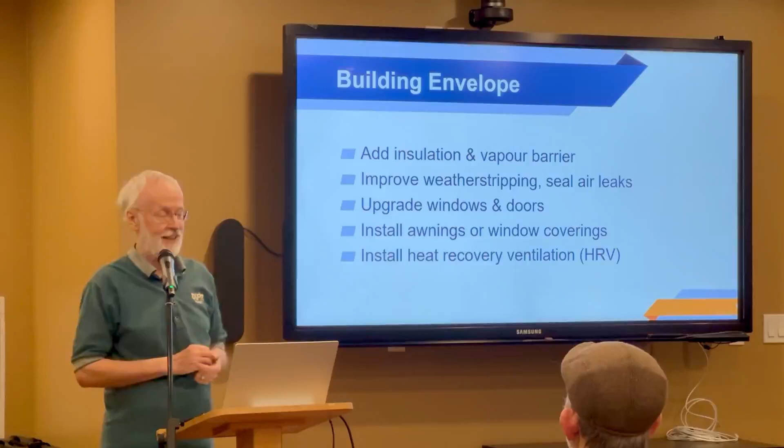So I'm going to go through just two of these examples, one for insulation and one for windows, and give you an idea how to do the calculations, what it's going to be worth.

First thing about insulation, you'll hear people talk about U values and R values. When you buy a bag of fiberglass of say R22 or R28, that basically is the resistance to heat passing through. It's measured in units of BTUs per square foot per degree difference across the front and back of it. Or metric, but that doesn't matter here.

So basically, if you've got fiberglass bat, you get 3.1 R value per inch. So a 3.5 inch gives you 11 to 13, depending on the manufacturer. A 6 inch gives you 14. An 8 inch, etc. The interesting thing is per inch, fiberglass bats are the cheapest and easiest to install, but they're also not the most efficient. So if you've got limited space, moving up to other materials gets you higher performance, mostly at higher prices too.

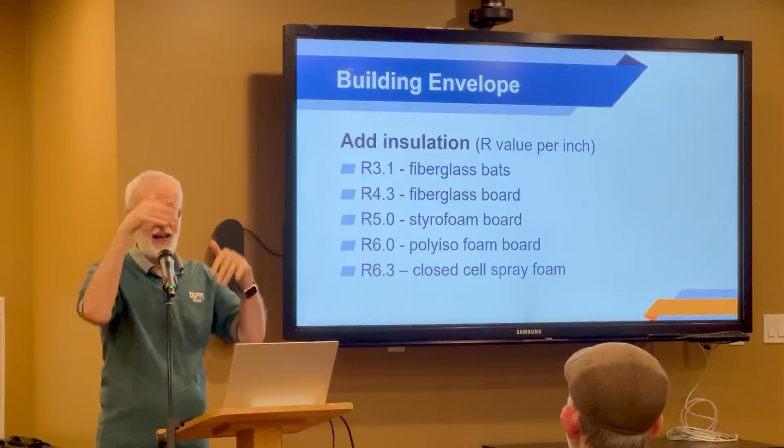So it's trade-offs. Fiberglass board would go on the outside. One of the problems with walls, typically 2x4 or 2x6, with insulation in between, is that the insulation might be R3.1 per inch, but unfortunately the wood is only about R1.5 or 2. So you've got chunks of wood letting lots of heat through, even though you've got a nice bat doing its job in between. So your wall isn't necessarily an R14 wall, it might only be an R9 wall because of the difference between the studs and fiberglass. That's one huge reason you don't want metal studs on an exterior wall, because they're like 0.2 or 0.3 compared to wood's almost 2.

So it's a huge difference. Fine inside, but don't use them on your exterior wall unless you have some way to break the heat transfer. So when I look at a building envelope, this is for a 1965 building that I analyzed, and what I do is look at the window area, how much wall area there is, what kind of construction it is, and what's in the ceiling.

The ceiling insulation might be 6-inch fiberglass in between the rafters. You've got doors, you've got ceiling, and whatever's on the floor. It could be on a crawl space, or it could be a basement, just concrete sitting on grade. How they insulate that makes a difference as well.

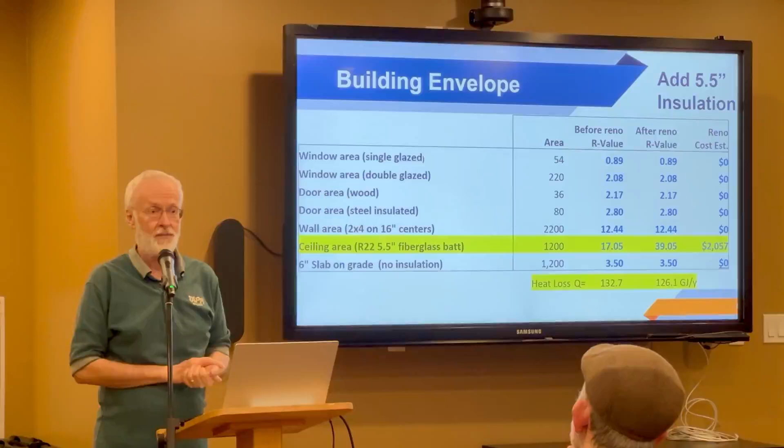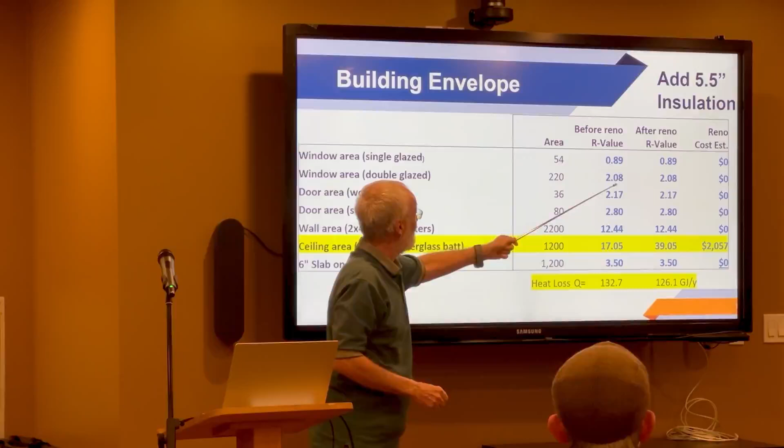So this house had some single glazed windows left. I guess originally in '65 they were all single glazed, but 4 out of 5 windows had been switched over to double glazed a while ago. They were the old double glazed aluminum with a very small air gap, so you can see the R value. Double glazed is much better. However, modern windows, the Energy Star argon filled ones with proper breaks in the frame, maybe vinyl instead of aluminum, are up around R4. So even just switching from an old double glaze to a new double glaze can have a big impact on your heat loss.

But certainly, if you've got single glazed, you want to right away go to something better. In this case, I'm just going to look at the ceiling area. It was a 1,200 square foot home with 2 levels, so 1,200 square feet up above and 1,200 square feet on a concrete pad.

It had 6-inch rafters and 5.5-inch fiberglass in between the rafters, a typical attic for that period. So what I said was, let's upgrade the ceiling area from one 5.5-inch bat by laying another 5.5-inch bat diagonally across on top of it, going to 11 inches total. It's very easy, something anybody can do, or it's pretty cheap to hire somebody to do it. It's just very simple to lay out.

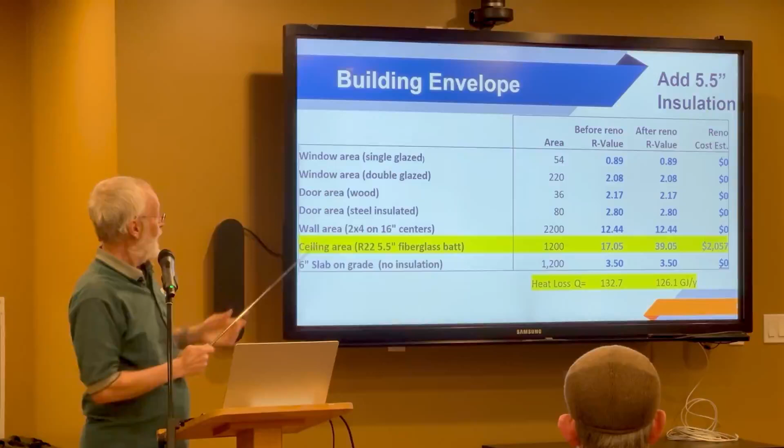And then you can see that R value goes from 17 to 39 because the batt that I chose was an R22, so just add 22 to the old one. And what that does is it reduces the heat loss.

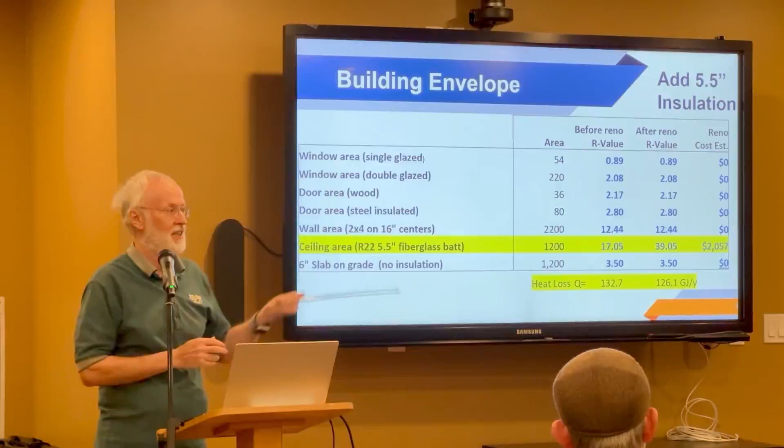If you remember when I told you last week, the average BC lower mainland house used 100 gigajoules. This one was using more, 132 gigajoules per year of heat required to keep the house comfortable. These guys kept it around 69 or 70 degrees Fahrenheit, which is 20 degrees C. When you upgrade the ceiling, it drops down to 126 gigajoules. So it's just a number.

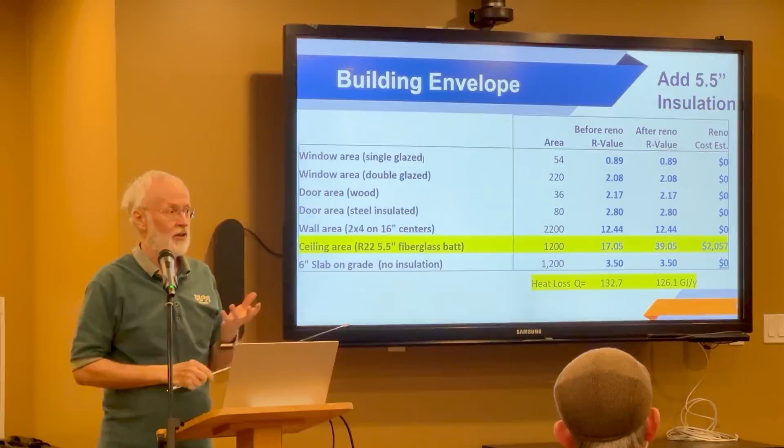The reason I'm telling you all of this is please go out and hire somebody like Ross or any of the energy advisors, because they will model your house. They will actually measure all of the surface areas, look at what's going on, and tell you here's where you are now, and suggest these things are good for you, and if you do it, here's how much you will save. Because with this information, again, the before and after picture for the Q, the heat flow, heat requirement.

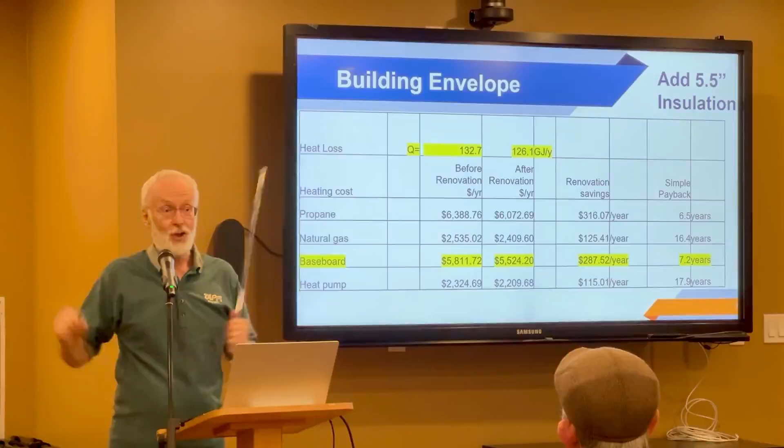If you're on baseboards, that was $5,800 a year that they were paying. Right, their electricity bill was huge. And you can say, if you fix it, you'll save $287 a year, so you have a 7-year payback to something that will last the rest of the life of your house. And you get, this is just if you had to pay for it yourself, you get credits that Ross will tell you all about, so it's actually way better payback. So again, if there's things like this you can do, this is really worth it.

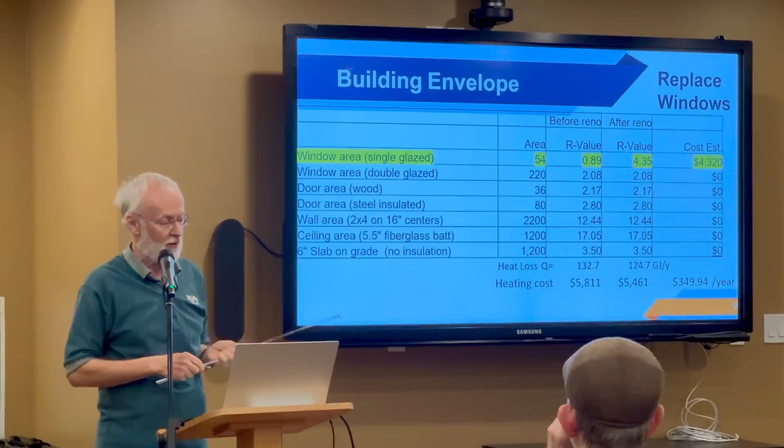And I'll go to another example about the windows, the single glazed I was telling you. So if you go from the 0.89 R value to a 4.35, which is the really good Energy Star argon filled window, it costs a lot more. The cost per window is about $80 a square foot typically that's installed. So you will save, see the change in the heat loss, which is worth $350 a year.

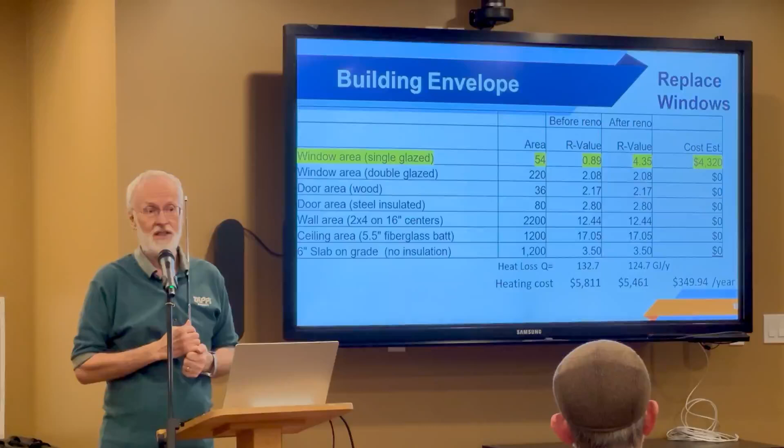So again, after you get, I think it's around 50% that you can get back as a credit, Ross will tell you the exact numbers but I think it's around that, then your payback is a matter of 3 or 4 years. So again, windows, once they're in, should last 25, 30 years. So totally worth doing. Okay, so that's building envelope.

Now are there any questions about that before I switch on to solar?

So the takeaway is either do it yourself or get somebody who knows how to do these calculations, and right away you can tell if it's worth doing or not. It's interesting, if you already had 8 or 10 inches of insulation in the attic and you wanted to add 6 more, the payback is dramatically less. Because as you get more and more insulation, there's less and less return, there's less heat leaving in the first place, so you have less to save.

Okay, I will proceed. So I'm talking about a solar energy system for electricity generated. PV means photovoltaic.

How do I decide how much I'm going to get? How much can I put on my roof? Which way is it going to be pointing? I can figure out how much it costs, so much for the installation. I just have to get an electrician and say I'd like to put something up. He'll tell you how much it costs, he'll give you a quote anyway. But the question is, how much are you going to make?

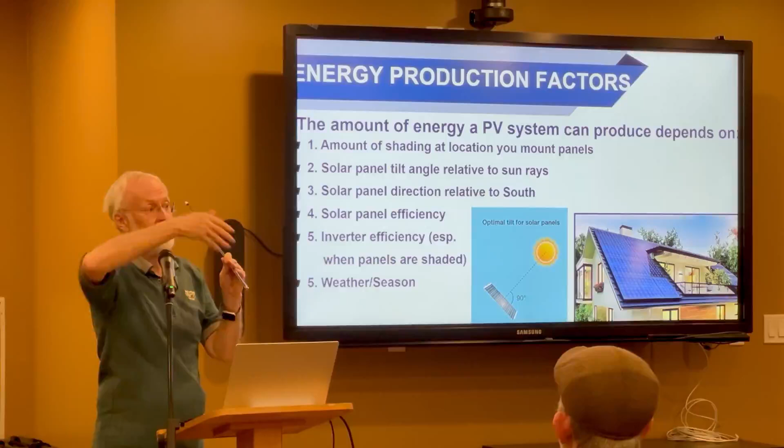And how much you make depends on how much sun reaches the panel. So the amount of shading, if you have a lot of shading, it's probably not worth doing. The tilt angle, so if the sun is there, you want your panel to be at 90 degrees to the sun, that will produce the most power. If it's really shallow and the sun is low in the winter, you have less area exposed to those photons coming down, so that makes a difference.

Are you pointing south or not? If you're pointing south, you get the most sun. If you're pointing east, then you don't get any of the afternoon sun because once it's past noon, the sun is behind your panel.

The solar panel efficiency has been getting better and better. So typically what you do is you want to look at, when you're purchasing them, how many watts am I getting per dollar, or how many dollars per watt is it costing me? At the moment, you should be able to get panels for less than $1 a watt.

They're just getting better and better. When I first bought mine, they were $4 a watt. It doesn't always pay to be early.

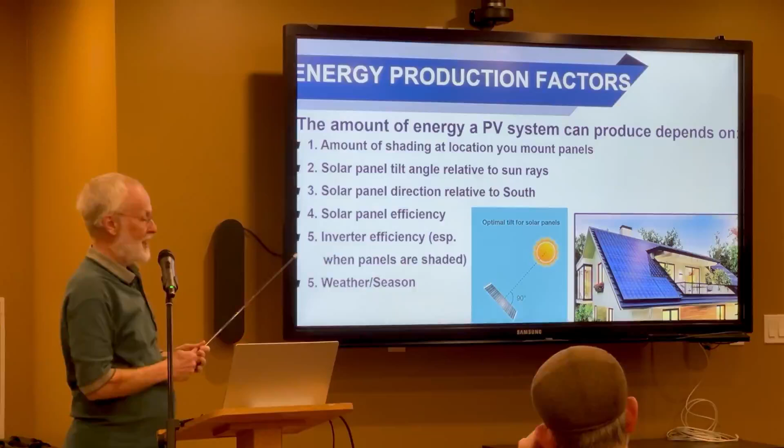Okay, and then inverter efficiency, they're pretty good. That's the efficiency of turning the direct current panel production into alternating current that feeds your appliances. And the weather and seasons.

So I'm going to just quickly show you this - seasonality and orientation. So the average BC household that heats with electricity uses about 15,000 kilowatt hours of electricity a year, 15 megawatt hours. So you can find out just by looking at your bill. You'll have either 12 or 6 bills in a year. Just look at it - it tells you how many kilowatt hours you used each period.

The other important thing is to know that production is about 10 times higher in July than it is in December. So if you're off grid, that's really hard on you, because just when you've got the most lights on and you're trying to heat your house, you get the least amount of solar.

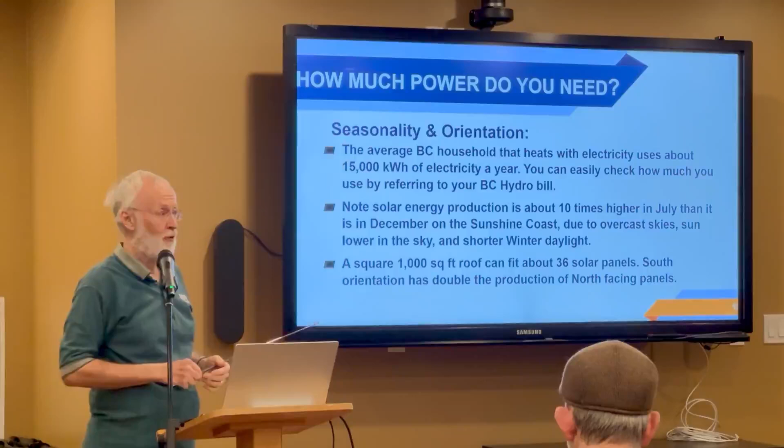So that's why we're super lucky here in BC. We have BC Hydro with their net metering plan, and that means that during the summer, they will give you credit for anything extra you produce off your house. It goes off to feed your neighbors, and then in the wintertime, they give you your power back and just remove those credits. So if you have enough credits, like I do, you don't have to pay anything other than the connection fee every 2 months - $12. Good deal. That's an extremely effective and cheap battery.

We're lucky that BC Hydro can do that. It's good for them because in the summer they don't have any water. In the winter they've got tons of water, and we don't have any sun. So it's almost made in heaven. It doesn't quite jive - there's like May, they have a whole bunch of water and we have a whole bunch of sun. But other than a couple of overlaps like that, most months it's a marriage made in heaven.

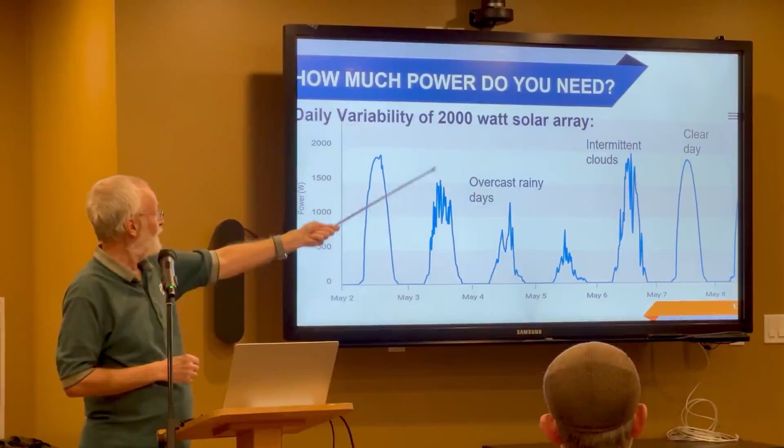So this is off some of my own panels - I happen to have this, made a nice graph. So this is here, and it was on those days, and it was for 4 panels. So you can see it made almost, at the very peak at noon, because of the way the panels were, they made their nameplate rating. But all the rest of the day, it's much less because the angle's not right, or the sun is lower - there's a bunch of different things, or there's cloud.

So if you have a battery backup system, like a 20 kilowatt hour battery that's part of your system, and you're off grid, when it's peaking during the day, you charge the batteries and you use it at night. So that's how the system would work, and that works perfectly well.

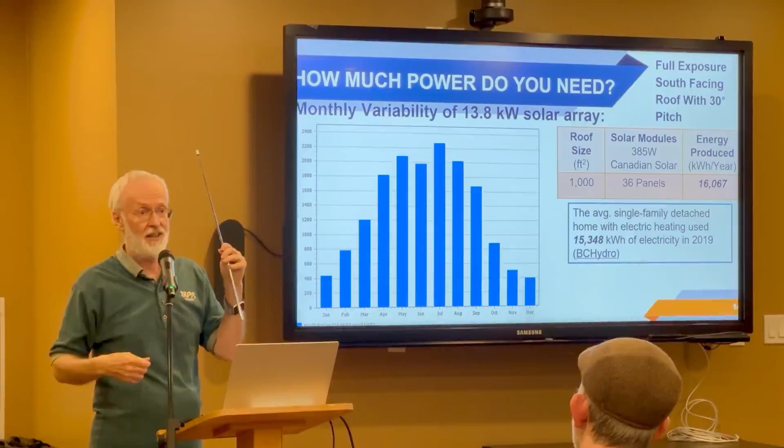You'll hear people say your pitch should be the same as the latitude, which would make it 49 degrees. However, in our area, because of the weather, a 30-degree pitch actually makes the most power for the year. That's because in the wintertime, the 49-degree pitch is designed to catch your winter sun - you'd want to do that if you were off grid. But for us, being shallower is better because you make way more in the summer than you lose in the winter.

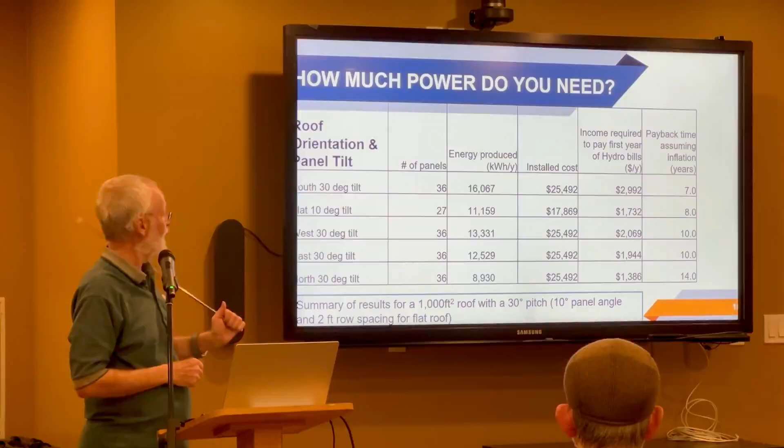So how much do you need? With a south 30-degree tilt, 36 panels makes 16 megawatt hours in the year, which, remember, we needed about a 15 megawatt hour amount to cover you for the year. So this is enough for the average house to become completely net zero power-wise.

It's got a cost. You'd save $3,000 a year on your bill, and payback time is 7 years without counting the credits. It's actually lower - you should get $5,000 back for this, so it's even better.

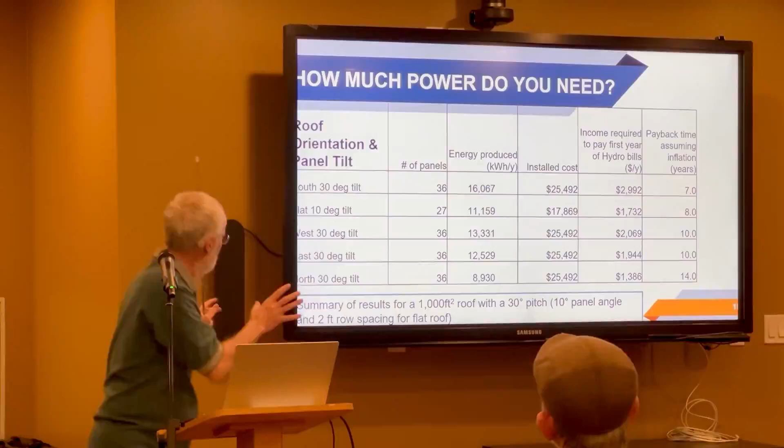Okay, now if it's flat - it's made flat. So if you have a flat roof, you can't get 36 panels on it because you have to raise them up at least 10 or 15 degrees to have them work properly, which means this part would shade the next one behind it. So when you have it flat, you actually have to leave a row in between each one. So you would only get 27 panels on a flat roof.

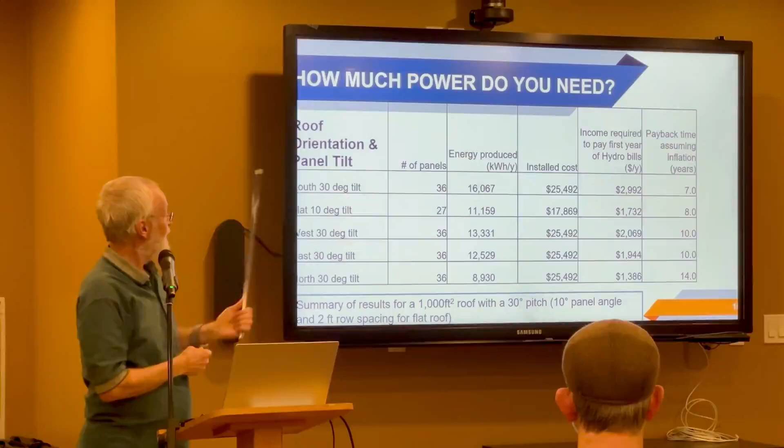However, it actually has almost the same payback. It was 7 point something, I rounded up to 8.

If you point west, it's the next best one with a payback of 10. Now, this is under the old system. BC Hydro has just recently put in a time of day rate, and peak happens in the afternoon, not during the noon time period. So you can actually save money by having it pointing west or east. So you can actually get pretty decent paybacks, even if it isn't the ideal south-facing roof.

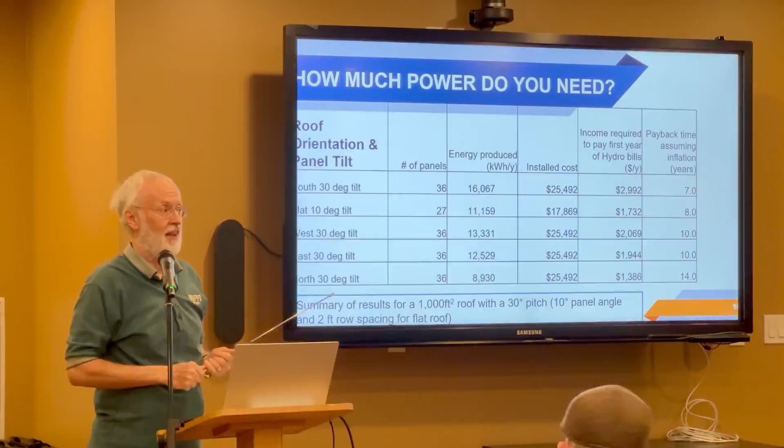And this has become really an issue in California, where a lot more people have gone to solar. They have so many roofs facing south that the value of power on a sunny day goes almost to zero, because they don't need it. They have to ramp all of their other producers down, and they're just flooded with electricity. So actually BC Hydro buys it during the day and then sells it back at triple or quadruple the price at night. So that's helping keep our rates down. I don't know if anybody knew that, but it's pretty cool.

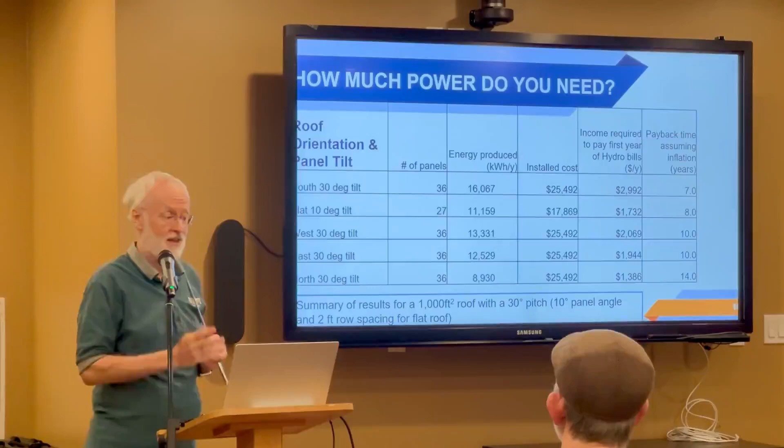It's great having water behind a dam. It gives you lots of flexibility. Okay, so that's that. So how do you do the payback?

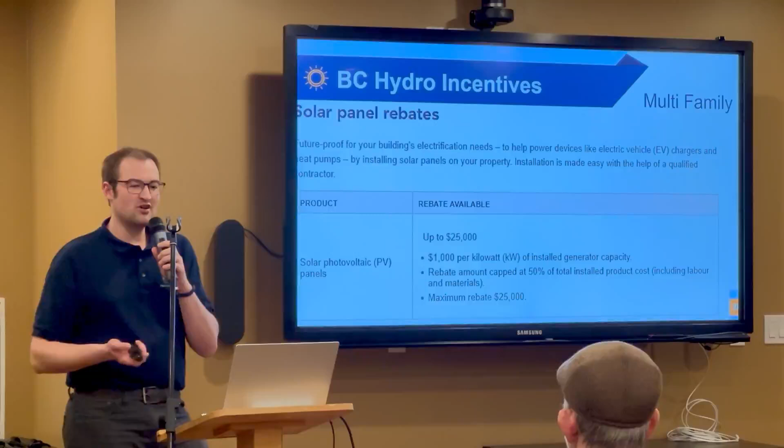So then for multifamily homes, there is a rebate of up to $25,000. Some of these rebates won't apply as much on the coast, just in terms of how the housing inventory here is, although they would apply anywhere that's in BC Hydro territory, including here. For multifamily, you can get up to $25,000 in rebates towards putting a solar system on. In this case, it's also $1,000 per kilowatt of capacity, and again it's capped at 50%. But even if you put on a 25 kilowatt system, you're going to be over $50,000, so you'll be able to capture that whole $25,000 grant.

For social housing, there is a $75,000 rebate available. This is one of the best ones because instead of $1,000 per kilowatt, they'll give you $3,000 per kilowatt of capacity installed. It's 75% of the total project cost they'll cover, as opposed to a maximum of 50%. So if any of you are involved with social housing here on the coast, that's something to definitely be aware of, as it could really cut back on power usage, and the amount of grants you can get is really substantial.

For commercial, you can get up to $25,000 rebate from BC Hydro. This will apply whether you own the building or are renting or leasing it. If you're renting or leasing, you just need an agreement signed with the landlord saying they're okay with the tenant putting solar on and collecting the credits, since the BC Hydro account is in the name of the tenant rather than the landlord. If it's in the landlord's name, they would be the one paying for it. Again, you can get $1,000 per kilowatt up to $25,000, or 50% of the total installation cost.

So in addition to the rebates for solar, there's also rebates for battery storage for all of these categories as well.

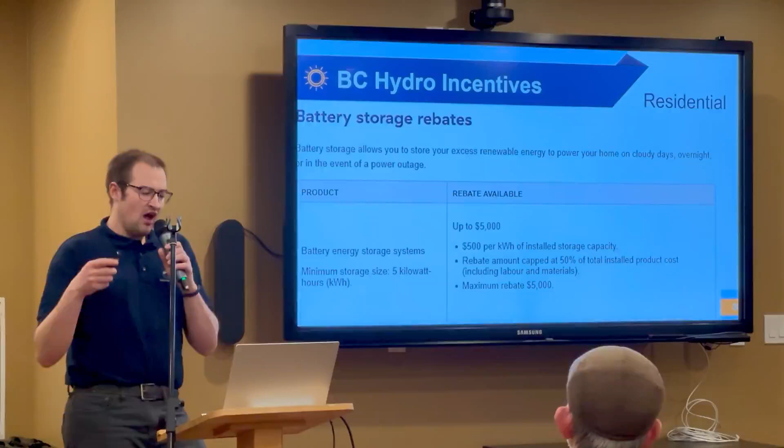In some jurisdictions around the world, the price difference between peak and off-peak electricity is very big. The two most noticeable ones are Texas, where the grid is deregulated, and the United Kingdom, which has a similar situation. In those places, some people buy and sell at the peaks, basically playing energy arbitrage, and some are paying off their whole systems in only a few years. Here in BC, the price difference isn't really enough to make that happen.

The big advantage of having a battery here in BC is for backup power. If you have one, you can go onto BC Hydro's time-of-day billing and program your battery to charge from solar or buy electricity overnight when it's cheap, then run it during the expensive part of the day. But that's not really a way to make money with the battery system, it just helps offset the cost a little. So the big thing is to have it for backup during power outages.

For this, you get $500 per kilowatt hour of installed capacity. It depends somewhat on how much you use for your house, but as a general rule of thumb, if you wanted to back up your whole house, you're looking at needing about 15 kilowatt hours of battery storage as a minimum to back up your whole house for a reasonable amount of time. That's much more than covered by the $500 per kilowatt hour, so you'd be able to take advantage of the whole $5,000 grant.

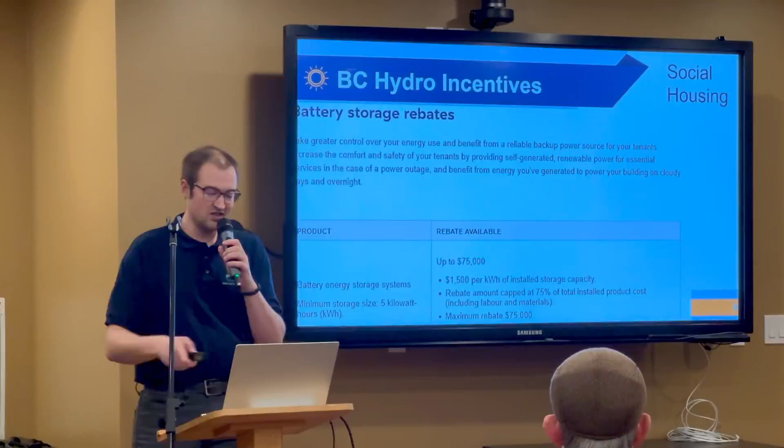Social housing can get up to $75,000 towards a grant for batteries, and again it's 3 times more than single family and multifamily. They can get $1,500 per kilowatt hour up to $75,000, and they also get 75% of the total installed cost covered. So I strongly encourage anybody here involved with social housing to really get on BC Hydro and apply for these grants.

Commercial will get $25,000 towards battery storage, at $500 per kilowatt hour, with a maximum of 50% of the project cost paid for.

So in addition to the solar and battery rebates, for commercial customers of BC Hydro, there are some other rebates they can apply for as well. BC Hydro will cover up to 25% of the cost of these installations.

One of the most popular is lighting. BC Hydro has a long list of approved fixtures, but it doesn't count for just swapping out your light bulbs for new LEDs - they actually have to be built-in LED fixtures. They haven't said the reason for sure, but my guess is that a new fixture will have a longer life than just swapping out a bulb, depending on the condition of your existing fixtures. They can give you up to $25,000 - up to 25% of the cost for upgrading to LEDs.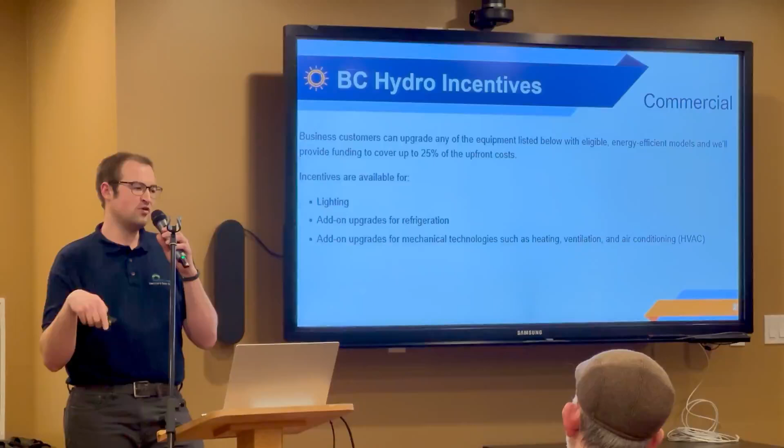Also, depending on what business you're in, if you're upgrading your refrigeration system, or upgrading to heat pumps or more efficient air conditioning, they will also cover up to 25% of the cost. How that works is you apply for the program and work with a BC Hydro Alliance member, and they'll walk you through what they'd recommend for your location and how much Hydro would give you.

Something really easy all of us could do tonight when we go home is sign up with BC Hydro Power Smart and become a team member. You just go online to your Hydro account and join the program, and if you're able to reduce your electricity consumption by 10% for one year, they'll give you a $50 credit. So apart from saving money on your electricity reduction in general, if you've signed up for this program, they'll give you an extra $50 at the end of the year if you make their challenge.

Also, for low-income individuals, there are certain other programs they offer. They will either send someone out to do this for you completely free, or send you what they call a big box with materials you can use around your house to save on electricity - LED light bulbs, high efficiency shower heads, faucet aerators to reduce water use, weather stripping, insulation wrap for hot water pipes, clothes drying racks, carbon monoxide detectors, and depending on the situation, they'll even give you a free fridge.

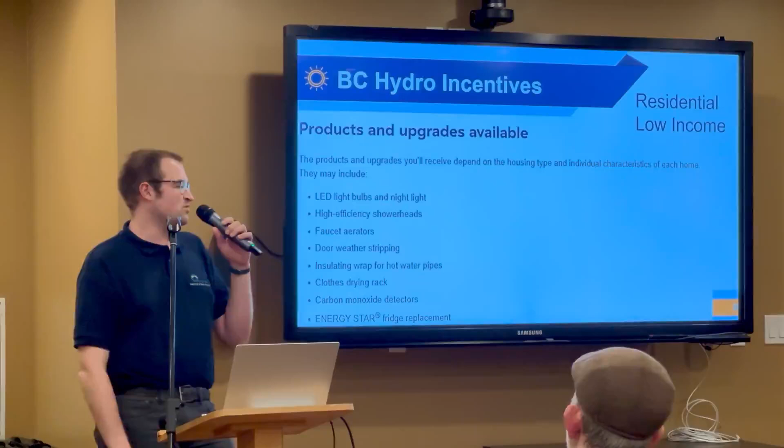So in order to qualify, there's a before-tax income and household size requirement you have to meet before Hydro will do this for you for free. If you're in this situation or know somebody who is, a lot of people don't seem to know about this program, so it's definitely worth spreading the word to get some free upgrades that will not only save money but also make their home more comfortable.

All right, so that was what I wanted to talk about.

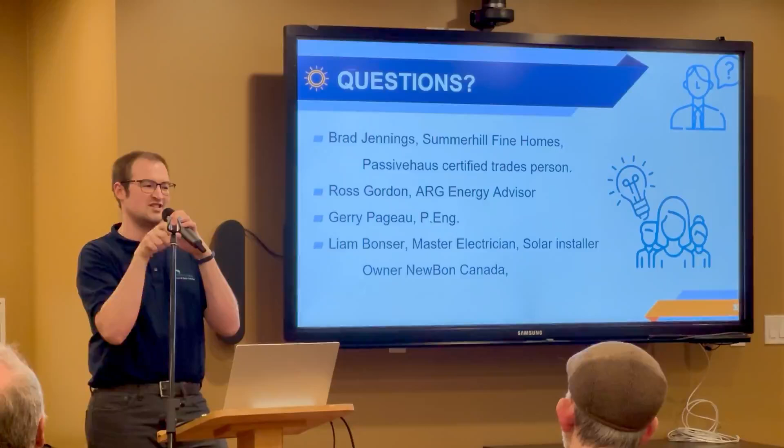So if you have the Chevy truck, you use the special Chevy charger that connects to the Chevy transfer switch that powers your house. To keep things really simple, so you can just use any vehicle you want, it would be best to set it up with a standard 240 volt generator cord end that just plugs into the truck.

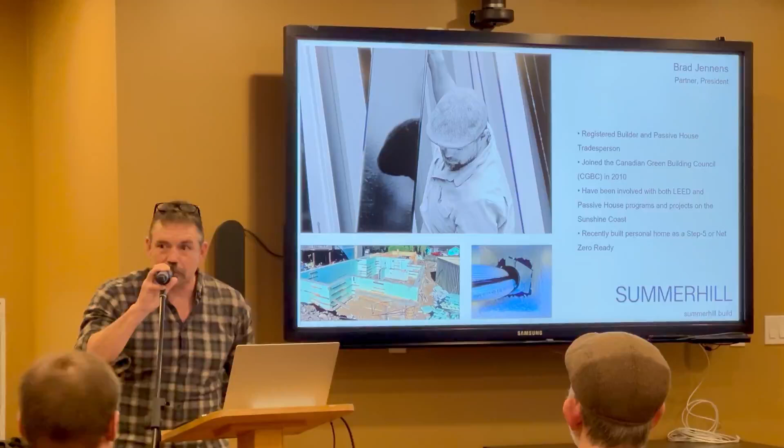I'd like to introduce myself. I'm Brad Jennings, president and partner at Summerhill Fine Homes. If you weren't here last week, I was sharing a project of my own, a personal house that I built in Gibsons to a Step Code 5 standard.

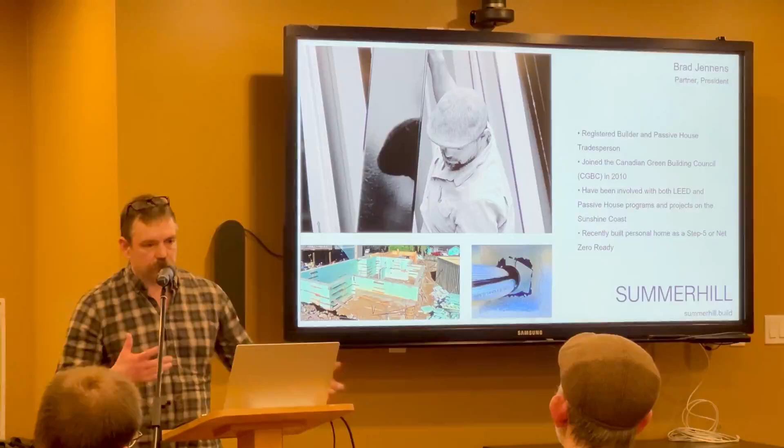Last week we focused basically on the thermal envelope. This week the focus of the presentation is about the mechanical systems in the house. In Step Code, we have an energy rating for the house, and we have a thermal energy demand intensity for the envelope, which is about saving energy, and then the mechanical side, which is about what the energy users are. So the first step is to build a tight envelope, which we talked about last week, and this is about not using as much energy.

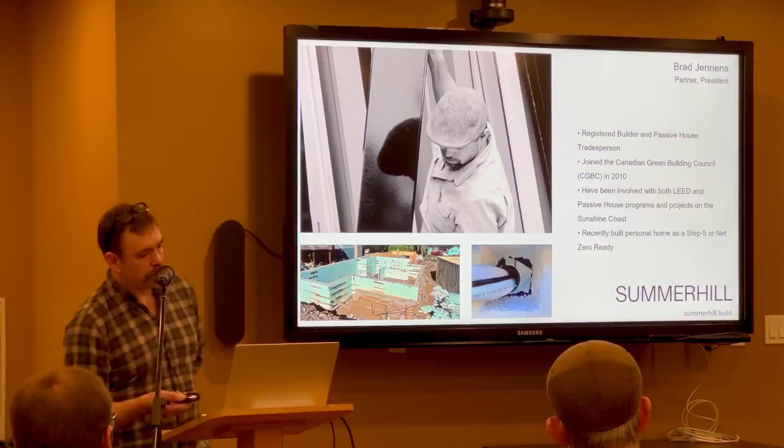I'm pretty new to this. Again, the side we're talking about now is the mechanical energy use intensity, and this includes the equipment and the systems in the house. So the heating would include the heating, the air conditioning, the ventilation, your hot water heating, and any on-site renewable energy.

First of all, let's talk about heating. Nowadays it's heat pumps, we talked a lot about heat pumps. They're obviously a very energy efficient way to heat your home. There's air to water heat pumps, there's air to air heat pumps. So there are many different systems that we use, and for me, I just wanted to keep it really simple, a simple system that was cost effective. So that was just an air to air mini split heat pump.

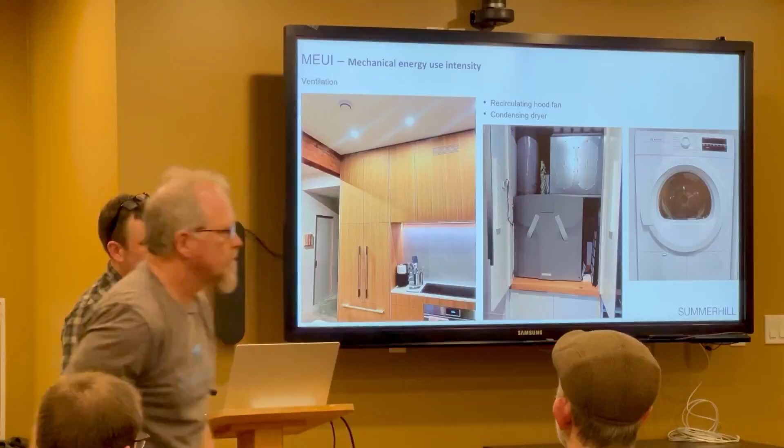But then there's - you can put different filters on too. So depending on the HRV, you can get HEPA filters. And so again, in the summertime, when you're in a smoky situation outside that we see often these days, you can have nice clean filtered air on the inside. So maybe talk to your contractor or whoever installed it and see if they can put a filter in.

Moving on, so just for a minute, talking about hot water. Again, in a very energy efficient house, the hot water becomes one of the biggest energy users.

In my house, when I look at the EnerGuide rating, hot water is taking up about 30% of the annual energy, whereas the heating load is only about 6%.

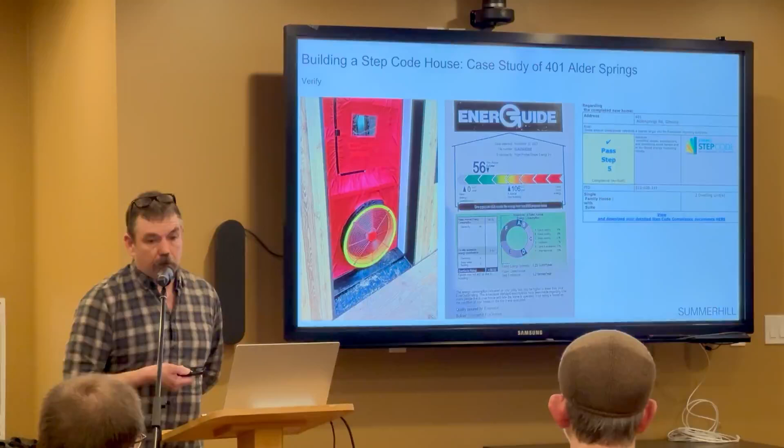We took advantage of some of that stuff, and I think the grants are even better now, so they're getting better, and that's obviously helping.

One of the things about the EnerGuide rating is that older houses won't have this, but new houses do now. It's kind of interesting because it tells you how much power you can expect to use over the year. You could probably size your solar accordingly.

It also identifies where your big power users are, and as mentioned, because of the really robust envelope in the house, the space heating was only 6% of the use. The space cooling is 8%, and that tends to be typical of really well insulated houses. They do have a tendency to overheat just a little bit in the summer because they've got the solar gain, and they're containing a lot of that heat.

So sometimes we do need a call for cooling. Again, water heating was 31%. Ventilation is only 1%, and I guess that's basically just running the fan. Then lighting, appliances is 30%, and others is 23% - that's all the other little bits and pieces in your house, running computers and TVs and that sort of thing.

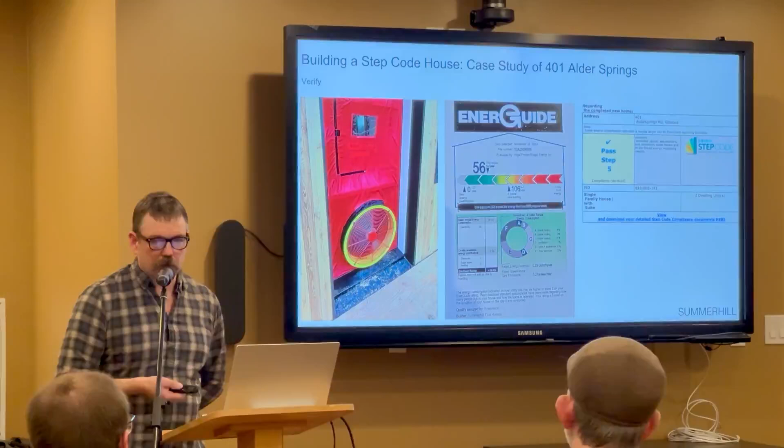It's all the more reason to get solar panels on your roof if you've got a suitable roof and exposure. So just finally, to ask the question: is the juice worth the squeeze? Is it all worth it? There's a lot to building a house and making it as energy efficient as possible - you have to ask, is it worth it?

First of all, I'd say as far as just monetarily, the grants do really help. They're quite generous, so in that sense it's helpful. As far as being in the house, it's very, very comfortable. I came home today, no heating on, and 19 and a half degrees - it's nice, it's a really temperate environment.

One of the things I kind of laughed at when David was talking about his Airbnb guests sitting on the tub - we've got a suite, you can kind of see it here in the house. Educating the people in the house on how to use it is a big part of living in a high performance house. The tenant, a super nice guy, friend of mine, loved to have the floors really cranking and the windows open, because it was great, right?

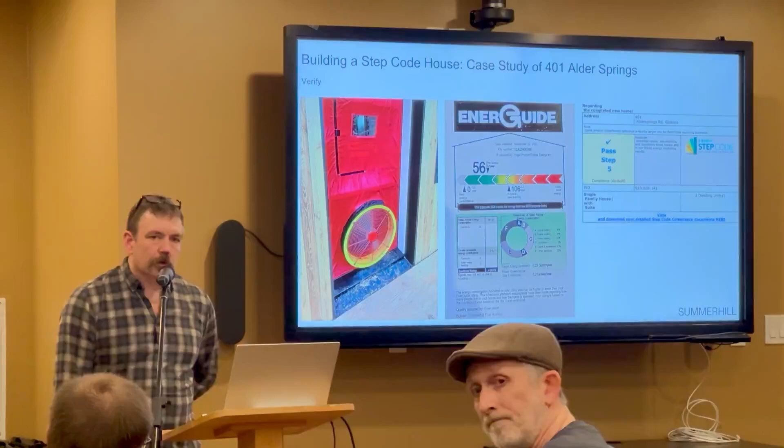Okay, yes - so I wasn't here last week, so apologies if I'm asking something you went over. For example, the heat pump you showed wall mounted - in that situation, is there existing ducting, or is that just a freestanding pump? Yeah, so that's exactly like what's behind us here - it's a ductless mini split. The refrigeration lines come directly into that unit and create the heat.

Yeah, so there are sort of hybrid systems that use minimal ducting, and it's concealed so you wouldn't see that. Does that mean you need one of those in every room in your house? No. To distribute the heat, yeah - in our house we have 3 heads, one in each bedroom upstairs just for nighttime cooling basically in the summer, and then we just have one in the main area upstairs, and it honestly doesn't come on very often. But yeah, that seems to be enough for any heating needs.

Yeah, well, and then with an HRV, don't forget the air circulation is pretty consistent. So if there is hotter air upstairs, it's going to get circulated.

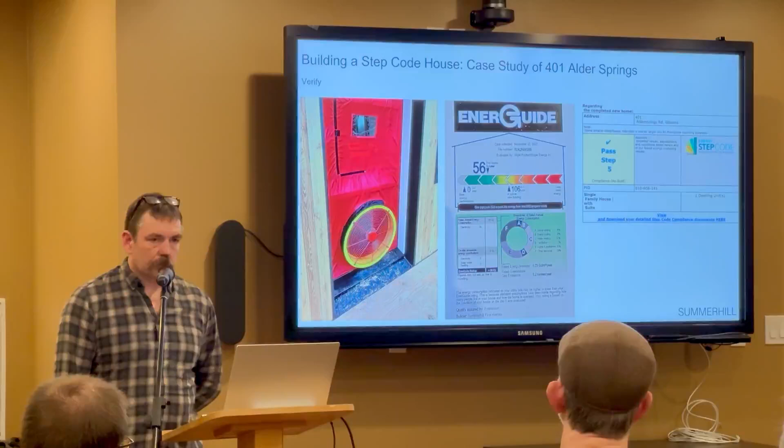Brad, I'm curious about that 31% for hot water and what can be done. Back in the day, I put a blanket around my hot water heater. I don't know how much difference that made, but is that still a thing that people do? I have a friend that has a solar hot water heater that he uses to preheat the water coming out of the ground before it goes into his hot water heater, to take the edge off the 5-degree groundwater. Talk a little bit about that.

Yeah, so we used to see a lot of solar thermal systems with evacuated tubes, and that was a very good way to heat your water. They're quite efficient, but I think they were a little bit cost prohibitive, so that was an alternative to heating it in a typical hot water tank.

It seems the approach now would be to just put on a few more photovoltaic panels, if you're likely already going to have that system. It would make more sense instead of having two systems, to just have some more photovoltaic panels there. So that's a good way to offset it, and of course, like you said, a more energy efficient tank, like the one that was in the picture, is helpful too. Yeah, thank you. Anyone else?

Before we go on to Ross, there we go. Brad, so do I understand - because I've had the honor of visiting your house - you've got 2 mini splits upstairs, and then a third mini split upstairs, and then no heating on the ground floor?

Yeah, so the ground floor has a little bit of radiant heat. That was from your ground floor, that picture. Yeah, so that's the ground floor. It's just an electric boiler, and because of the super insulation levels there, it doesn't get very stressed. Like I say, today it was 19.5 degrees, and we've got the floor set at about 17, so it's not coming on even on daylight today.

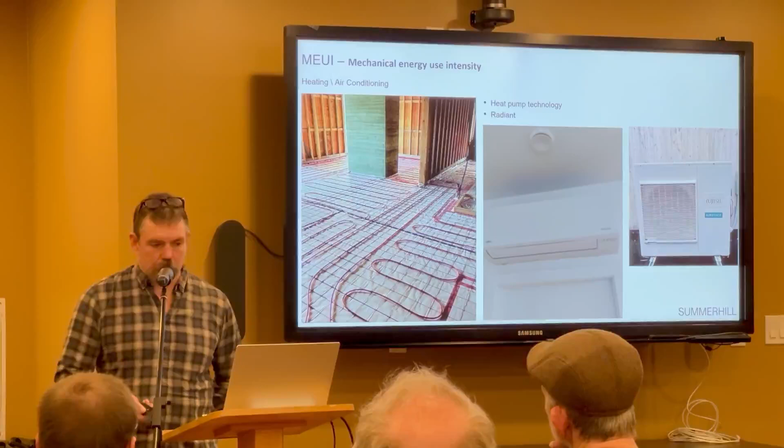So my name is Ross Gordon, and I work, live and work here on the coast as an energy advisor. So I do a lot of energy modeling. We talked a little bit more last week about some basic house science to ground things, but now we're at the stage where we're starting to think about all the things we might want to do and how much they cost.

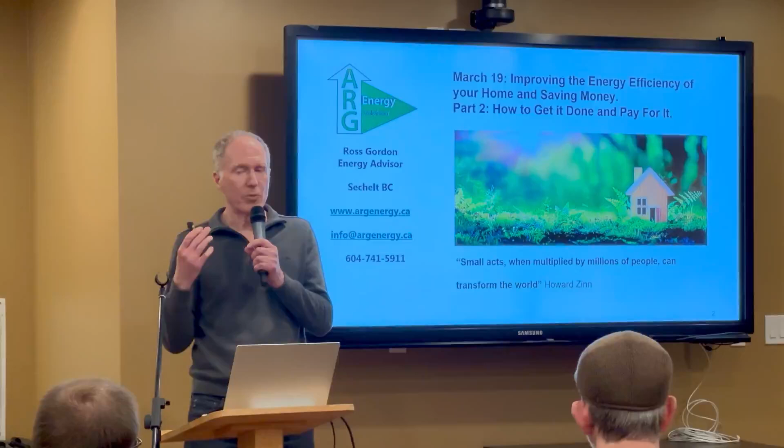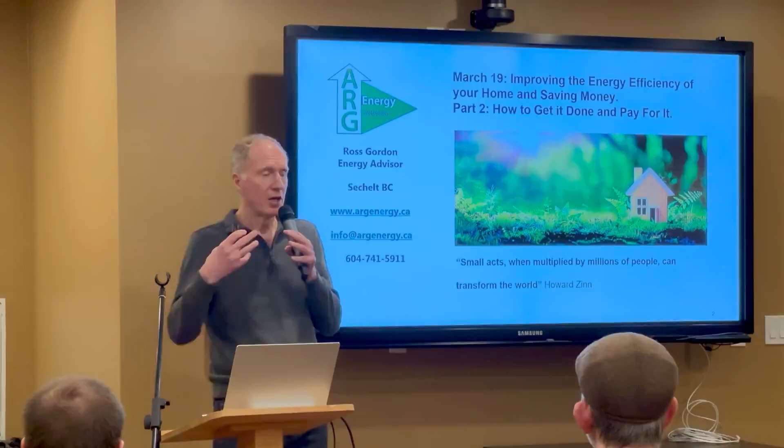So most of my talk tonight is going to be about rebates and loans and things like that. I think it's also important to remember why we're doing what we're doing, because at the end of the day, home comfort is a big part of it. It's important to always keep in mind what your goals are in terms of how you want to live in the home, how you want to feel in the home. So it's important to keep those things in mind in making your plan, as well as the monetary aspects.

So here we go. I've got a handout here, which is a takeaway summary of many of the programs I'm going to talk about. One of the challenges with the different incentive programs out there is that they're really big, because they're trying to do a lot of things for a lot of situations and a lot of different types of upgrades. So routinely I talk to people who've gone into the websites and started to gasp for air a little bit, trying to figure out what they're doing. So what I'm going to try to do tonight is just streamline your ideas.

Liam did a wonderful job on the solar, which was great, because I don't really need to dig into that. It's impossible in this period of time to talk about every rebate that's out there and how much insulation you need to get $900 on a 1,200 square foot roof.

But what I can do is help you understand the programs, and I do have a website which is designed as a bit of a yellow brick road to help you. So if you're looking at windows and you want to know about the provincial program, there's a link to the provincial program, and that way you can go there and come back again and not get floundering around so much. So that's available.

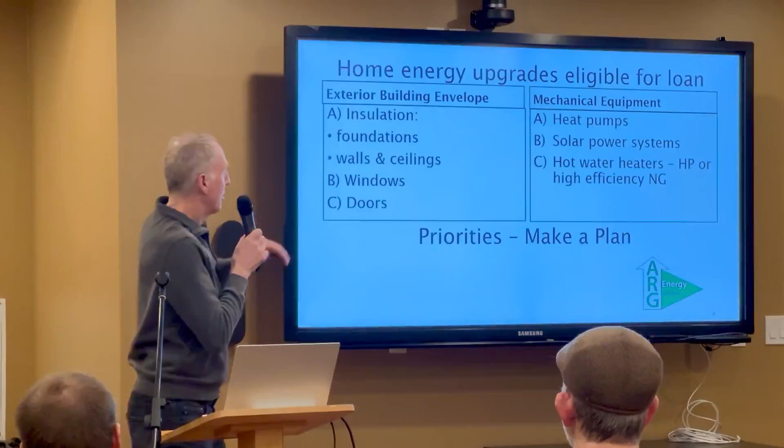In any case, I think everybody's got the idea from all the great talks we've had. I've learned a lot from all of you guys tonight too. There's been so much detail and expertise in this room, and in the audience too, amongst some folks I know here. So just keep in mind the stress is on the planning, to figure out the right combination of changes to make to meet not only your financial goals of reducing your costs, your hopeful goals of reducing your footprint on the planet, and also making your home more comfortable. Those are the things to be trading off.

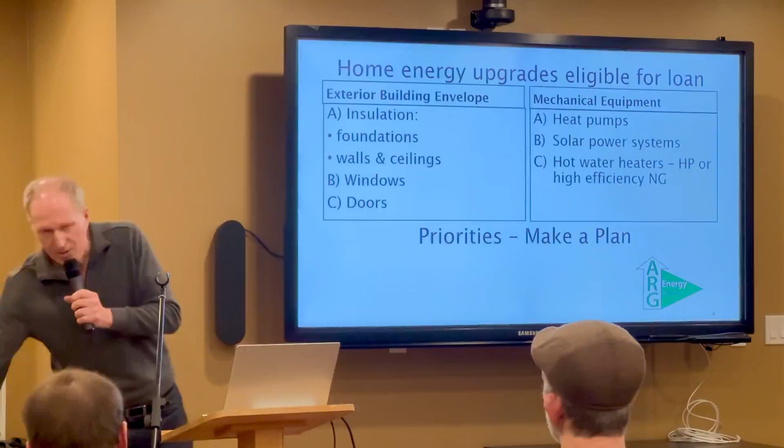On this handout, again, every day I talk to people who say, I was on the website and what do I do now? And the websites are big because they're trying to do a lot of things. So I have a sheet available here as a handout that has what I've drilled down to about 8 basic steps for the loan program. If you keep that as your Yellow Brick Road, you'll be okay.

So the first step is you have to get a Natural Resources Canada Energy Advisor, which is one of the things I do, to perform an energy pre-evaluation. That produces the EnerGuide label you saw, as well as a 2-page report with some specs on your home, because when I come to the home, I measure every single window and project the U value, et cetera. And then you get about a 15-page report.

Usually what I do is recommend upgrades for just about everything. A fellow called me today, I was at his house a week or so ago, and I sent him his reports - he had reasonably good windows, basic Energy Star ones. He said, well, why did you tell me I need new windows? Because if you have a couple of old ones and you decide later you want to change something I didn't recommend, you're not qualified under the loan. So basically, everything that might make sense or that somebody might want to do, I recommend it. You're not obliged to do any of it, but at least you're qualified if you decide you want to.

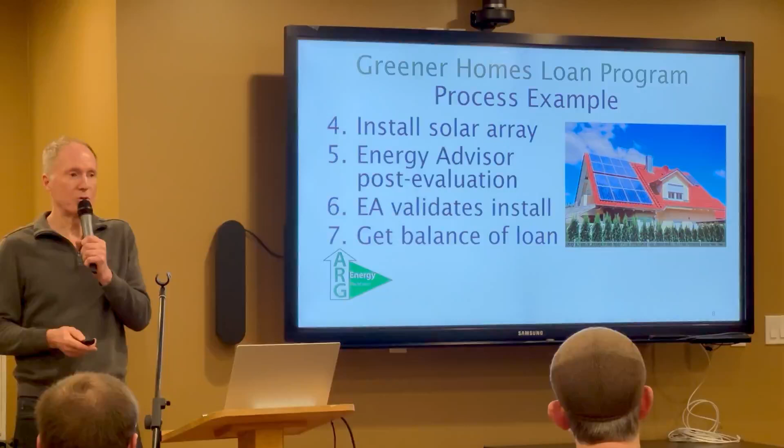If you're thinking of going on that journey, feel free to get one of these to take home with you tonight. It's got Province stuff on the back that I'll talk about shortly. And because sometimes it's two months later and then it's, what's the next thing to do—that sort of thing. All good? Yeah, okay.

Get the evaluation done and the loan approved before you do the work. That's critical. I get calls all the time saying I heard about this program and we just put all new windows in. No, sadly, that's not how it works.

So what is a home energy evaluation? Without getting too far into it—just keeping an eye on the clock here, we don't need to get too deep—but basically it's everything we've been talking about, all the different aspects of the house from top to bottom that have anything to do with energy consumption, creation, and loss.

And remember, we've talked about HRVs and ERVs—they're actually considered part of the house envelope rather than mechanical use intensity, because if you think about it, it's part of the wall, since it's moving air in and out. There was a question about ERVs earlier—a lot of companies, I was at Buildex exhibiting a week or two ago, and some companies are actually just making ERVs now.

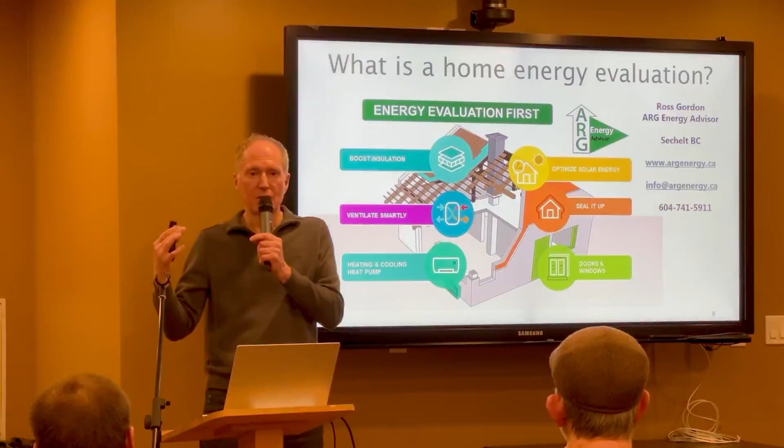You don't necessarily have to live in a really humid climate to get the value of these systems, because inside the house we make a lot of moisture—showers, baths, washing, people, pets, dogs, that sort of thing. I'm not allowed to plug manufacturers because I'm product and contractor agnostic, since I'm licensed to evaluate these things. But there are major manufacturers that are going just ERVs now.

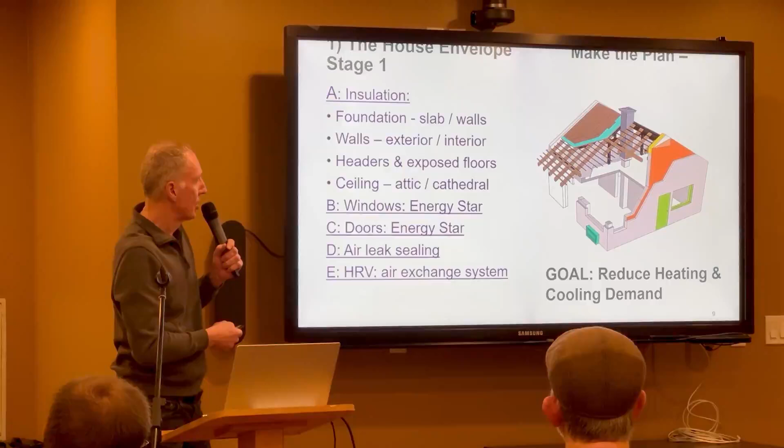I think we've covered all that, so we don't need to get into too much detail here. The idea is to reduce the heating and cooling demand.

To clarify on heat pumps, since there were questions about that: people often don't realize heat pumps are moving refrigerant, not air, in terms of the energy. They might be blowing air, but between outside and inside, it's refrigerant being moved, not air. They're so effective because as part of moving between a hot situation and a cool situation, energy is actually being created in that process. That's why a baseboard heater gives you 100% efficiency—you put one gigajoule in, you get one gigajoule out. A good heat pump may give you 2.5 to 3.5 times efficiency, because you put one gigajoule in and get maybe three out, since the refrigerant changes state as it moves in and out of the house, creating energy. That's the reason for the great efficiency.

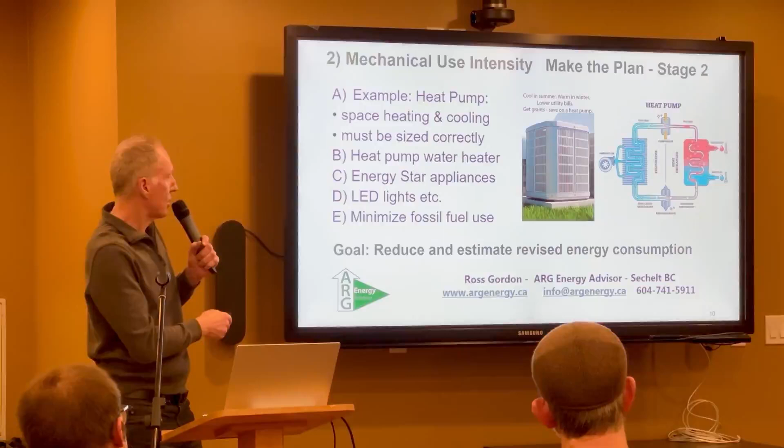Jerry did a wonderful job talking about all these different appliances, light bulbs, and things—reducing demand. Now just to clarify on heat pumps: there are basically two types in terms of air source heat pumps.

There's a ducted system—if you have a furnace, we'll talk about that in a moment—with an air handler that blows air through ducts into your house. That's very similar to the internal component of a ducted heat pump. You have a fan coil outside and an air handler inside blowing air through the house. The refrigerant moves between inside and outside, and the air is blown over a coil in the air handler to heat or cool the house.

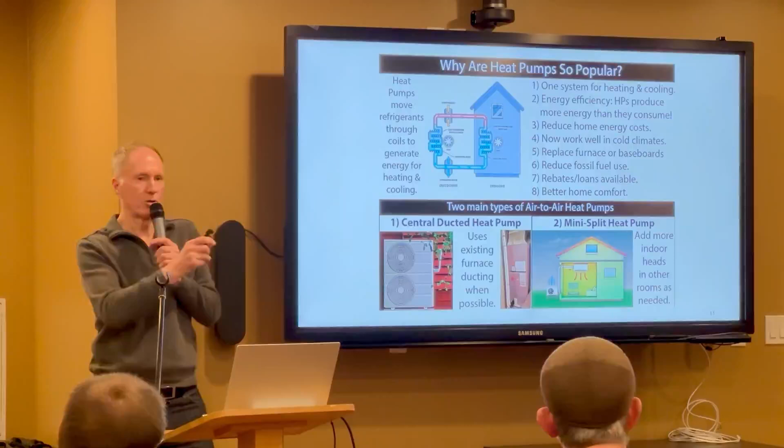Does that all make sense? The refrigerant is what's moving inside and outside; the air just moves within the house. That's why you need the HRV, because the heat pump isn't moving air in and out of the house—that's the HRV's job.

Then you have the mini split system, same idea—you've got the coil outside and the heads Brad was talking about, that we looked at up top here on the inside. That's the difference, and it depends on the house. Most of what I'm talking about here is for retrofits of existing homes; I'll talk a bit about new builds at the end.

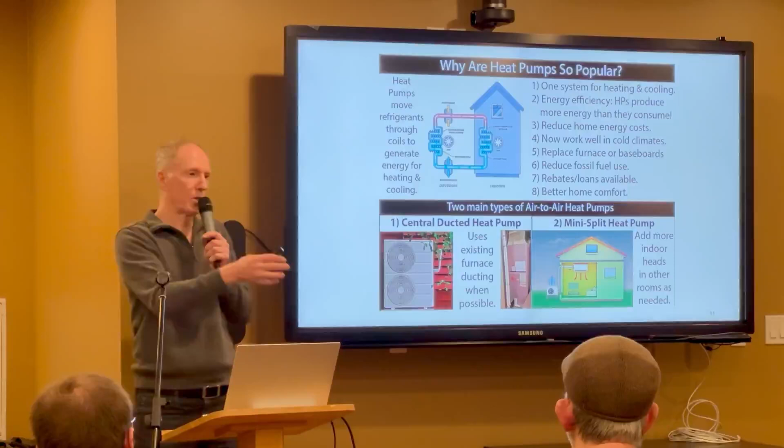When you're retrofitting, there's always a logistical issue. If you have a house with only baseboard heaters and no ducts, that's a more complicated retrofit to put a ducted system in, depending on the house configuration. Sometimes there's a crawl space that makes it fairly simple. That's a question for your contractors—my job is basically to set you up for this if you're doing it with the loan, and then you work with your contractors to make the right choices.

Renewable options, again, all part of the plan. You saw the EnerGuide label and how we can reduce the amount of gigajoules we use.

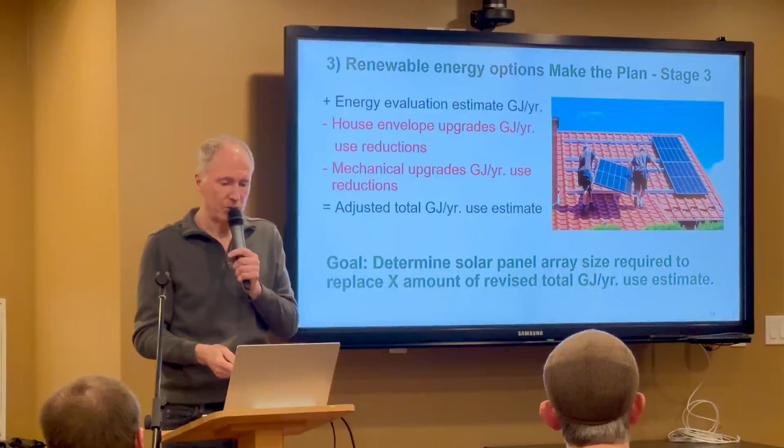Provincial—we've talked about BC Hydro. Now one thing that's a little confusing is, on the sheet on the back, feel free to come get one at the end and you'll see more about this in a moment—Clean BC Better Homes is sort of a macro program.

Some of the rebate money - I'm careful to use the word rebate, because that's what they call them for simplicity, and we don't think about Greener Homes grants and that sort of thing. The provincial rebates, if you think of them as a category under Clean BC, except for the solar rebate, this was a great breakout the way we've done it - use Clean BC as the front door to learn about all those rebates.

Some are funded by BC Hydro, some by FortisBC, and some by the province, in some cases with support from the feds behind the scene. But use Clean BC as the front door. Worry about who's actually paying it when you get to the end and you're sending in your application, because they'll tell you to send it to BC Hydro or Fortis, just for simplicity. If you go onto BC Hydro's website, you'll see some of the things in Clean BC. You go to Fortis, you'll see some of them. It's just go to Clean BC and then you'll get it there. It's almost simple, but not quite.

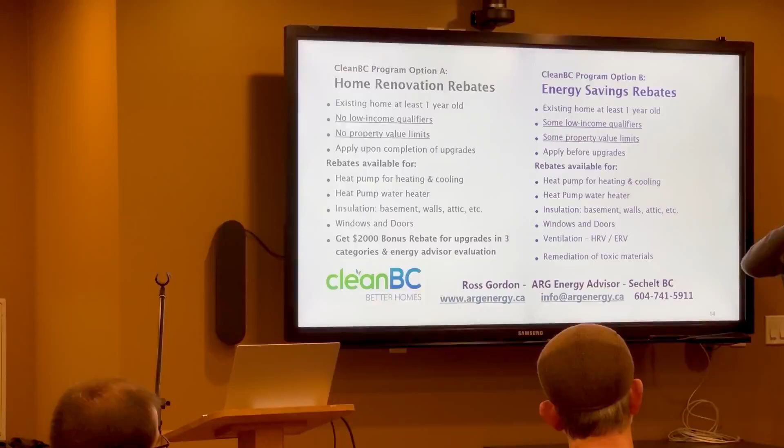If you're looking at rebates, this is where the most money is. But similar to the chart Liam showed, there's a household income qualification level, and it varies a bit depending on what you want to do. They're more flexible - if your income is higher, you can still get some heat pump money under this, but maybe not other things. In any case, under this program there's quite a lot of money. You can get 10 or 15,000 towards heat pumps, but you have to meet both the household income qualifications and the value of the house. Sadly or happily, our real estate market here is a little on the high side for this, so you may or may not qualify.

Basically, what I advise people to do is look at the chart and see if you qualify. If not, don't think about it anymore. The website's pretty sprawling, and if you get banging around looking at what seem to be really big rebates in this one, it'll just make you sad.

But what's really good about this program is for people who couldn't access the other programs, the contractor bills the government directly. This was a huge problem before, because lower income people couldn't bridge the money to pay for it up front and get the rebates. So it's a great program, but it has some limitations of access.

If you do want to do it, you need to get registered in it first. You don't need to have me come and do an energy evaluation - it's not required - but some people have me come anyway so they can figure out what to do and make good decisions. So check this out. If you're in it, great.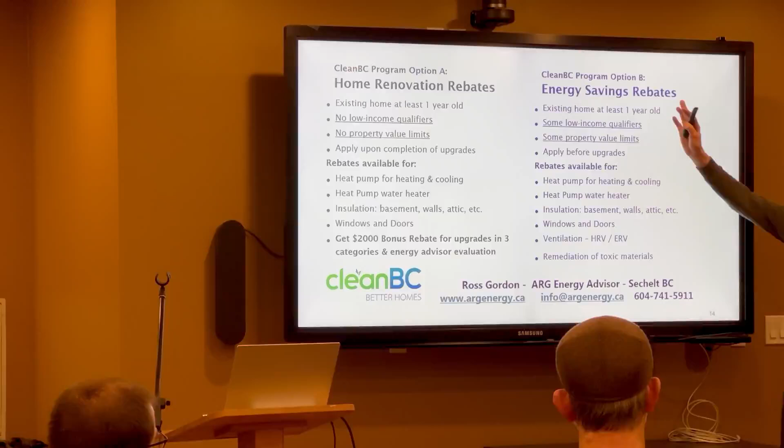If not, then you're looking at the home renovation rebates - just stay there. The links on my website are mostly to this. Again, you'll see provincial programs here. I won't get into the weeds of the amounts because there's too many, but this program has no low income qualifiers, no property value limits, and it's available for quite a long list of things. There's a formula for each thing, and you have to make sure you meet the specs.

If I do an evaluation and you do things in three different categories - say a heat pump, some new windows, and some roof insulation - there's a $2,000 bonus just for being a good BC citizen and doing three different things, provided it's meant to help offset the EnerGuide evaluation cost. And even if you do two things, there's $300 in this program. So it's a pretty good system.

Keep an eye on it, because there's a new heat pump rebate coming into this program May 1st. If you're switching from a baseboard heater to an electric heat pump, right now there's only about $1,000 available as a rebate - there's going to be more, about 4 times that. There's going to be a little more work to do on the sizing.

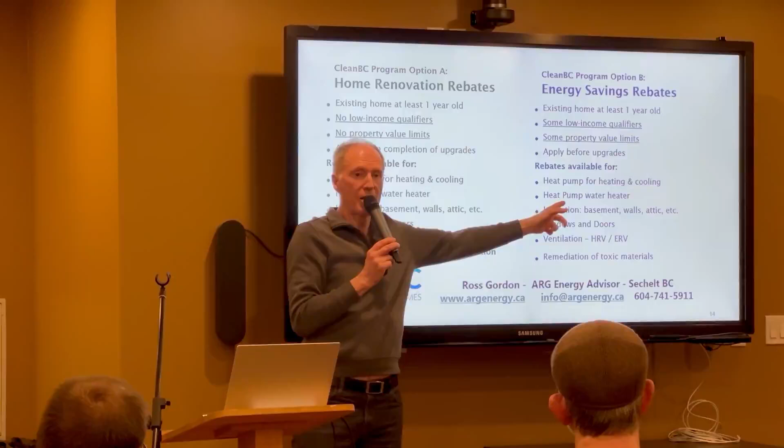This slide is basically on this sheet to get you started. So the main thing to remember: there are 2 different programs. Pick your stream. I have a client that is qualifying for some items in that. You can't do the same item in both streams, but there are situations where you can do an item in that stream and in this stream. In this system, basically you send in your invoices within 6 months of putting it in.

And they turn around pretty quick. I should mention there's an 800 number helpline on this program. Fabulously trained people, and they usually pick the phone up, and if they don't know the answer, they go find somebody and call you back. I've used them over quite a period of time, and they're very, very patient and helpful. So feel free to take advantage of that.

So just to round up here, this is a newer rebate, and it doesn't fall as cleanly under the Clean BC element. There's also a version of it available for new homes. This is what's called a dual fuel heat pump system. So if you have a high performance gas furnace, in some cases people have them already, you can have a...

Coil that is connected by refrigerant tubes to the outside fan unit, and you stick the coil in the air handler natural gas furnace, and they put on a special control. So when the outside temperature goes below a certain point, where the electric heat pump's efficiency starts to drop as it gets colder and colder, it'll automatically switch to gas. There's an efficiency balance. That's what's called a dual fuel system, where it picks its most efficient method of operation. They've just, a few months ago, rolled out a renovation program for that, and also for new home builders.

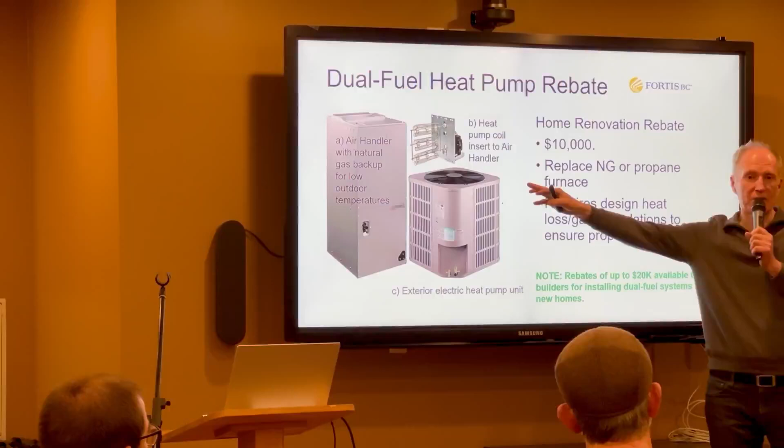Fortis is in the gas business, so they're trying to encourage combinations. The beauty of it, of course - I helped my son-in-law and daughter put one in their house. They didn't have any air conditioning, they were having babies, so they put one of these systems in. They already had the gas furnace, and now they have the heat pump add-on, and now the house is nice and cool in the summer. It was a minimal upgrade, yeah.

Do you need that here? Like, at what temperature would it go to the furnace rather than the heat pump? Because I just moved here from the interior, and my heat pump went almost all year round. So that's heat pumps - you can buy a heat pump that can operate quite efficiently at -15 and -20. Yeah, it's not... and that's what I have, although it doesn't get quite that cold here.

The efficiency does start to drop, so maybe at minus 18 or something, you're not getting 2.5 times efficiency anymore - maybe you're getting 1.2 or something like that. Because gas is cheaper as a fuel, there's a cost efficiency factor as the electric heat pump's efficiency starts to drop as it gets colder. Then there's a cost efficiency of the gas coming in terms of powering it. Do you need it? Not necessarily.

Does that make sense? Oh yeah, I understand that. That's what I'm wondering though, is it something that's actually recommended for this area? It seems like it's designed for a different climate.

It's a province-wide rebate, and my son-in-law and daughter's house is in Edmonton, where they're running at 25 or 30 below for extended periods of time. But there is a point - I went to a big Fortis presentation and they've got lots of charts and graphs. Of course, they're in the gas business, and they have lots of charts and graphs to suggest at different temperatures there is some advantage.

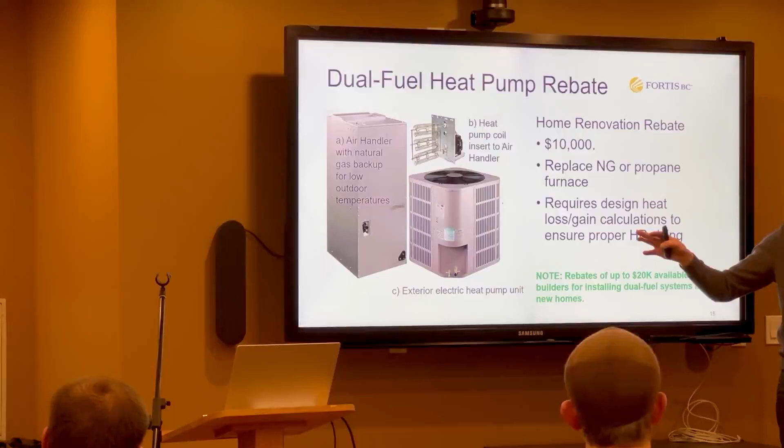Some people love gas and want to have a gas furnace, so it's a solution for that situation.

I've got to keep moving here because we're starting to run overtime.

So, BC solar rebates, we can jump ahead on that. Again, you can do the rebates and the Greener Homes loan. I also wanted to mention, to finish up, one of our fabulous sponsors, the Sunshine Coast Credit Union - there's a banner at the back - has eco home loans, and my understanding is that you could be doing those in tandem with these other programs as well.

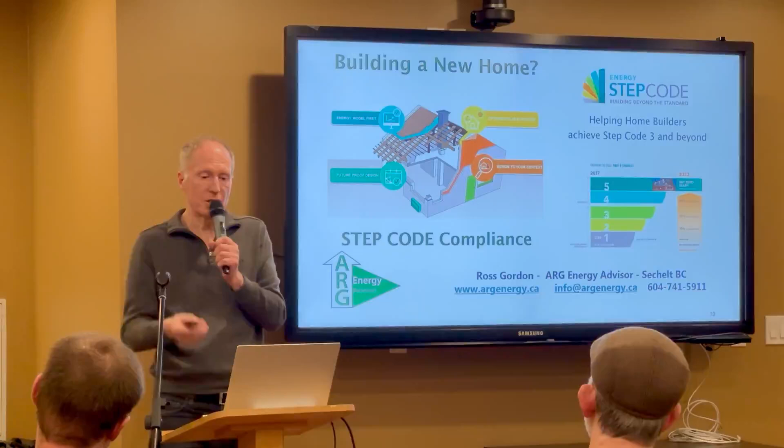The routine for building a new home is very similar. I take the same information from plans and model it, then go back to the client and the builder and say, here's what step code you're going to be at, here's what kind of EnerGuide consumption you're going to be at, and then we can plug and play pieces early on to decide how far we want to go in terms of making the home efficient.

There's something - I won't get into the weeds on this because there are lots of details - but now I'm seeing more builder clients work with me on something called the integrated design process.

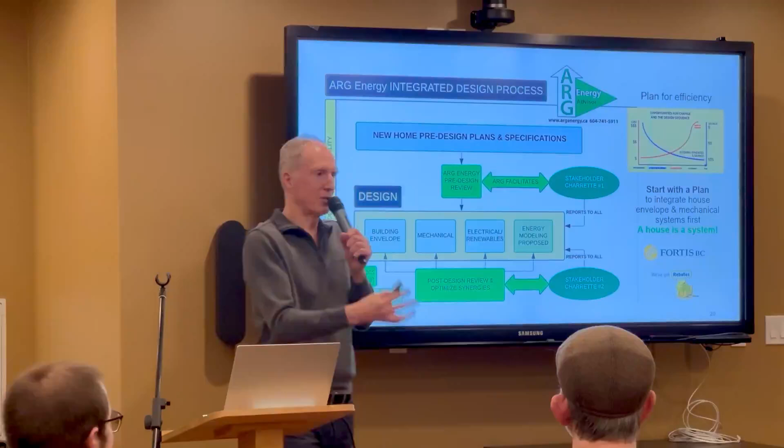The classic joke about building a home is that imagine if you went to buy a car and went to the dealership and wanted a fancier ventilation system - they wouldn't go to the back and start plugging some stuff in. Cars, phones, things like this use what's called the integrated design process, where everybody involved in the building of the home gets together - all of the stakeholders, all of the builders, even preferably some of the tradespeople that are actually going to do the framing - get together and are facilitated.

This is something I do as a premium service, where you facilitate meetings and plan where all the holes are going to be in the house with everybody present, so that we don't find out later that there are surprises. That way everybody goes away with a clear understanding of where it's going.

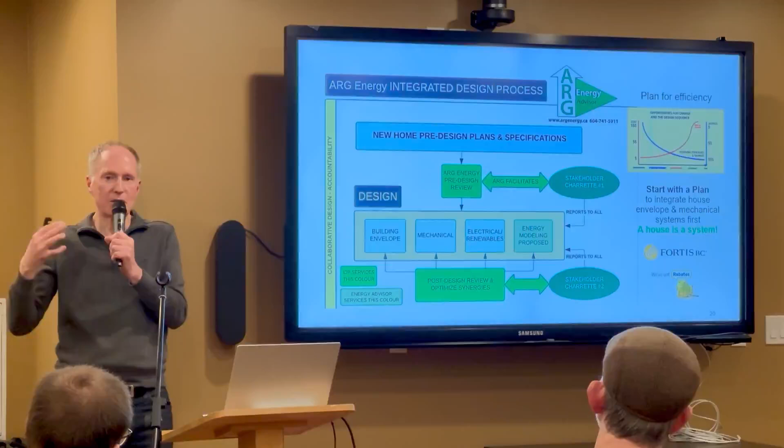Some builders need these - Brad's incredibly experienced with the Passive House and has a great team - and not every builder has that depth of experience, and the idea is to avoid surprises later. With the little graphic here, you don't need to read the fine print, but it means if you have to fix things at the end, it costs a lot of money. If you plan it early, it costs a little more, but then you're further ahead.

So that's me, and any questions?

Start over from the beginning. Or can I do it in reverse? And make sure, if you're interested, feel free to grab a handout on the way out. Yes.

Just a question about Fortis - there's a big downside to using gas for the climate, right? Yep. So I assume it'd be better not to use gas.

That's a really good point - I really want to get the greenhouse gases down. The dual fuel setup will answer your question too. Oversizing the heat pump has a massive impact. So if you have to have a heat pump that will handle every single day of the year, you need, say, a 60,000 BTU heat pump. If you back it off so it only handles all but the worst 10 days, you can get away with 48,000. That system will be far more efficient the entire year, and on those 10 days where in the nighttime the gas pops on, it will have almost no impact. So that's the idea - if it's properly sized, I don't have a problem with dual fuel.

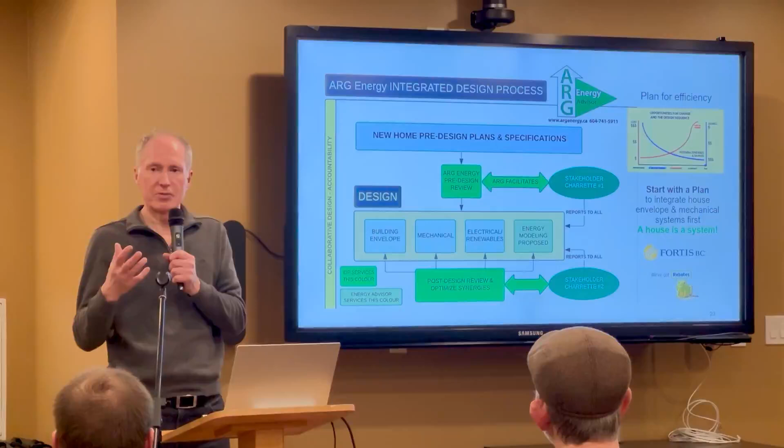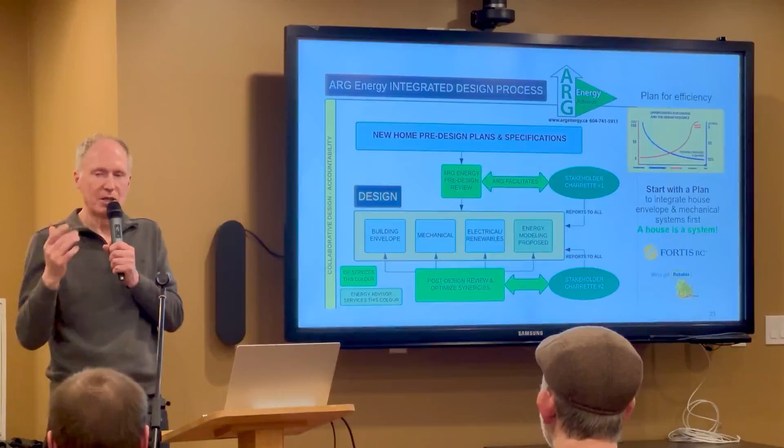I'm just wondering if you can tell us ballpark what a home energy efficiency evaluation costs. Usually for a house up to about 2,500, under 3,000 square feet, I charge $595 for the pre-upgrade. And it's quite a lot of work. I'm usually on site for 2 to 3 hours because I'm literally measuring every single window and crawling into your attic, crawl spaces in the wintertime. But most of the work is the modeling afterwards because there are entries made for manual data entry for every window, and then the modeling of it to make sure it's accurate. I charge a little more as the house gets bigger because it's just more of everything. Then usually it's $300 for the follow-up assessment because I'm not having to measure everything again.

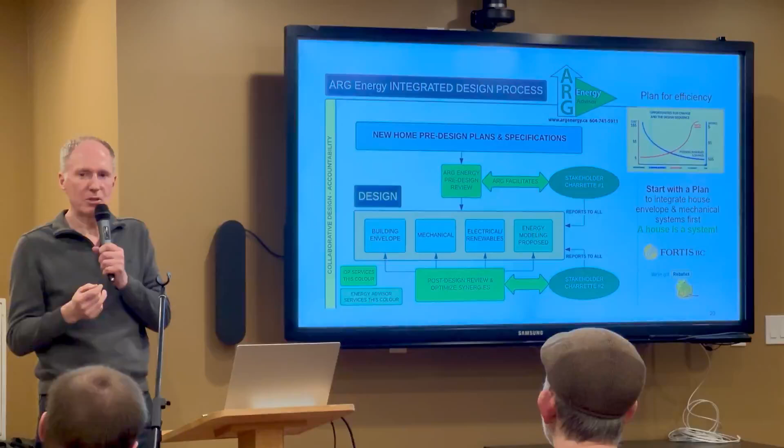But if you give me a grocery bag of window stickers, it will be more. But if that helps you, yeah. I try to budget in about an hour of coaching throughout the process at some point, if the client's there. Sometimes they'll follow me around with the air leak test and show them where the leaks are. I take pictures of all the air leak spots and send that, but sometimes people like to see it, so I try to provide kind of a premium service as best I can.

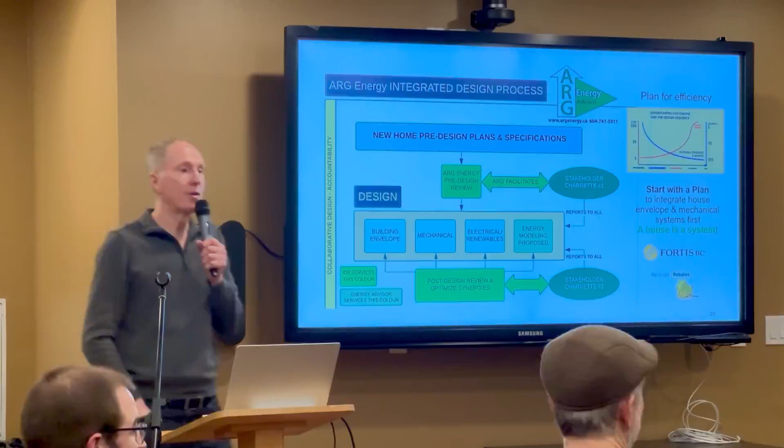Thank you. Any other questions? Yes, I have a question for maybe all the panel members. I'm just wondering, I've got a big voice. Well, please do, because we're recording.

I'm wondering if there's such a thing as a green homes tour in this area on the coast. I don't think there's such a thing. It's a great idea. I just moved from a place where there was an annual green homes tour, and I think people applied or put their names forward because they'd done a certain amount of upgrades or built passive house. That's a great idea, it was very informative.

I think it's a good idea. We might follow up on that.

I have a bit of a two-part question, but hopefully quick. Is wood renewable? And one thing that kind of drives me crazy is when I see the hot air leaving the house. Is there heat recovery for a natural gas fireplace or for a wood fireplace where you can get more of the heat out of it without causing problems?

Yeah, as far as wood being renewable, I did a little research yesterday myself because I was wondering what is considered a renewable energy source, and biomass is considered renewable energy. So gas would not be, fossil fuels would not be, but wood is considered renewable. As far as the heat leaving the house, there's so much heat coming in off of wood burning fuel, it needs to escape somehow.